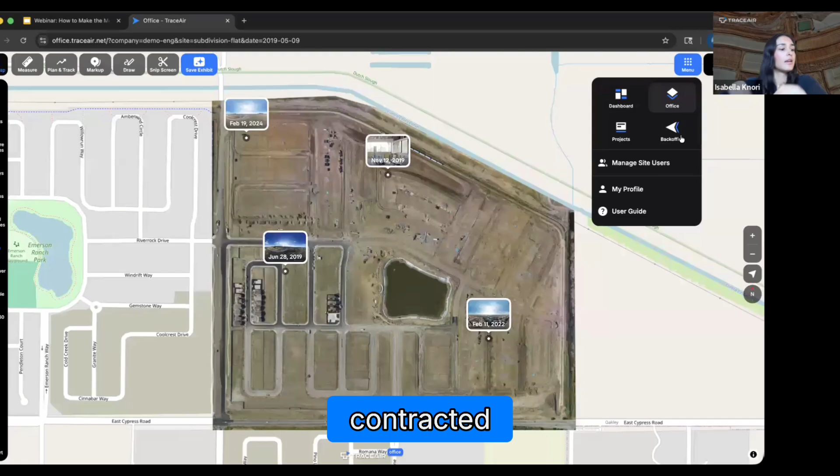The next thing that's really important that week one is setting up your Pano 360. So every time we fly the site, you get an updated panorama shot. Usually by default, we're taking this at the center of the site, but we can take this shot anywhere. And this is one of our most popular tools, even though it's just a quick visualization. So making sure that we're capturing this over an important area of work, whether it's the active grading area, maybe an important amenity that's going to be installed, or a tricky offsite area that you want to keep tabs on, getting that set up week one will also really help set the project up for success so you can monitor what's really important to you on the project. And on your larger sites, we can add additional Pano 360s as well.

Now, the other item that's really crucial for week one is your overlays, your overlay uploads, and your overlay management.

So Ray's going to turn on the overlays tab over there on the left. Your overlays are all of the two-dimensional files that can be uploaded to the platform, really anything in CAD format. This is one of our most popular tools - you can catch so much just with your overlays, because you can see how the site is shaping up in real time compared to your plans.

For those larger projects where you're going to have dozens and dozens of files, creating a folder structure to keep them organized is super crucial. That's something I definitely recommend doing week one - setting up your folder structure, adding all of the relevant CAD, and keeping it organized so everybody can clearly understand where your files are and how that structure works. Super critical week one.

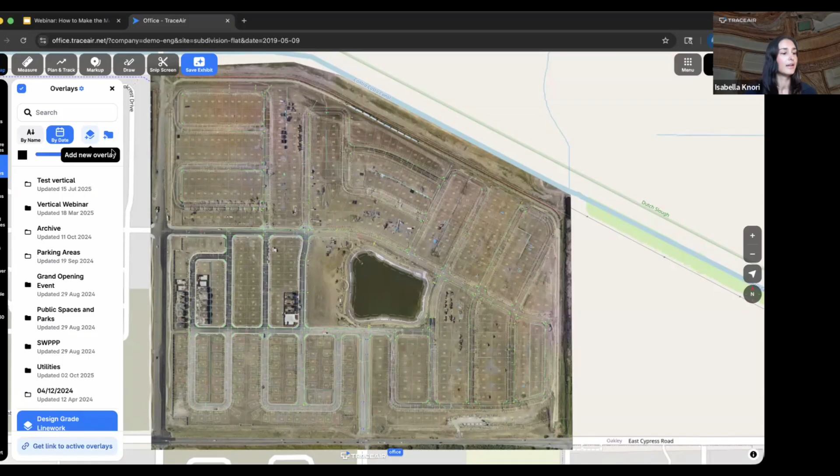This is something that Ray's team can really help you get set up and organized on that kickoff call as well. Next, week one is getting familiar with some of our more basic but powerful tools.

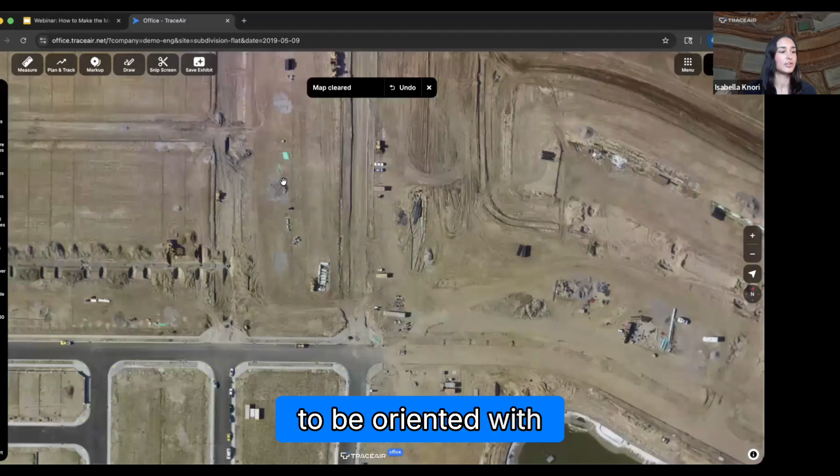So let's look at the measure tab. Week one, I would really want my clients to be oriented with stockpiles and the cross-section tool - again, super simple, but really powerful. So Ray's going to show these real quick for us.

Stockpiles - we are going to be able to measure any stockpile you have on site and get those quick calculations. Ray is just measuring a really small stockpile here, but you can do any size and quickly get those quantities. We're not comparing to any files, just raw dirt quantities. You don't have to wait for the surveyor - super quick information about your site and the dirt that you have.

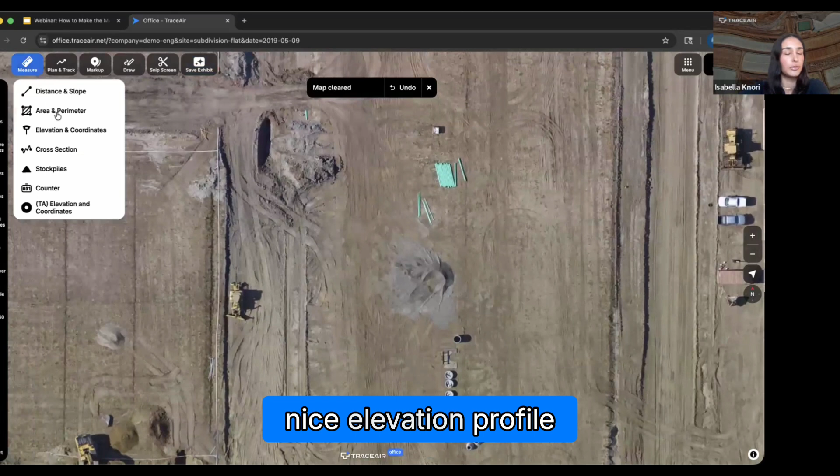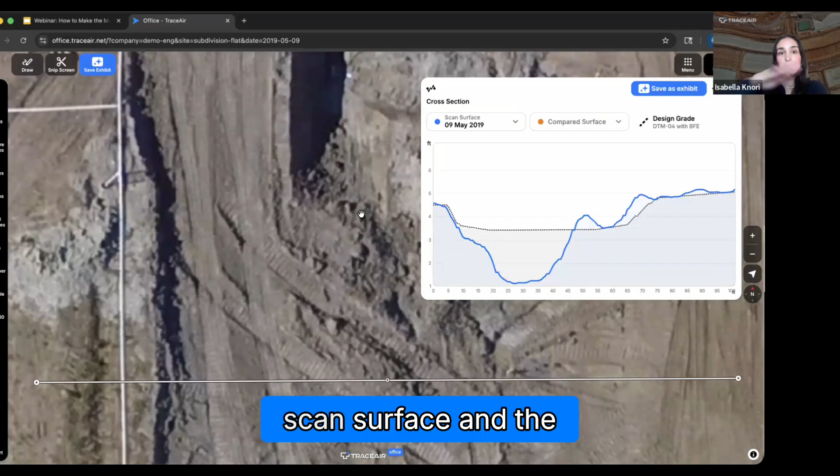And then the other one is cross section. Cross section is going to give you a really nice elevation profile. Ray's just going to draw a nice linear feature here over this road. When he makes his selection, you can see the blue line is the scan surface and the dotted line is the design grade. So you can easily see how close to grade you are from a really nice cross-section elevation profile view. Super powerful.

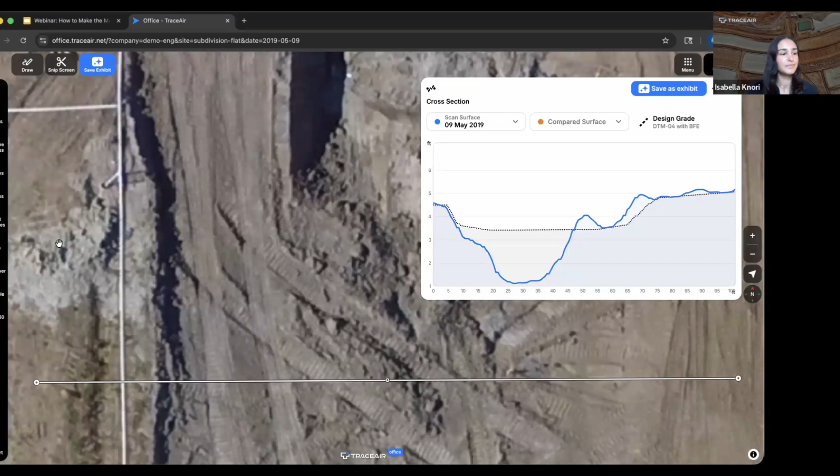And this works really well with your overlays, right? Turn on your overlays and use those files as your guide to your measurements. So that would be week one.

Now let's jump into week two. Ray's going to show you a couple beneficial tools for that week two. Maybe you have your second scan week two, right, for weekly flights. Let's see what Ray's going to show us for week two.

The first tab I want to draw your attention to here is the Compare Surfaces tab, because this is going to be the foundation of the next two tools we'll be looking at. If you click on Compare Surfaces, the first item you'll see is Design Grade. If you activate this, it's comparing the current surface of May 17th to your design grade, showing what work needs to be done to get to your design grade.

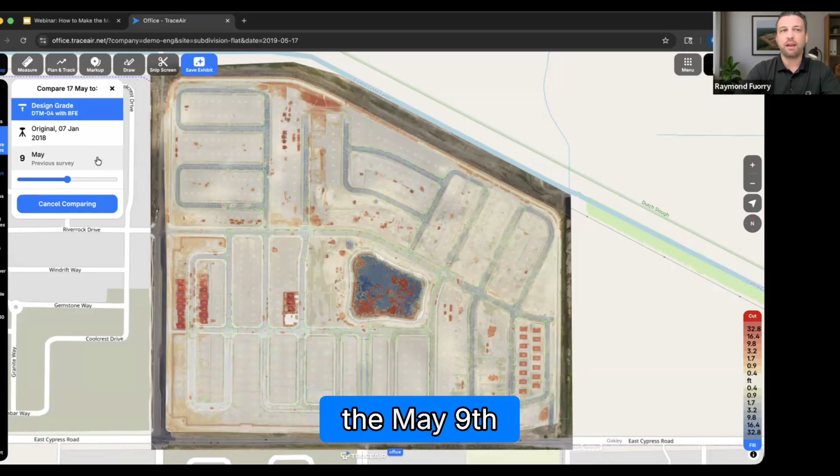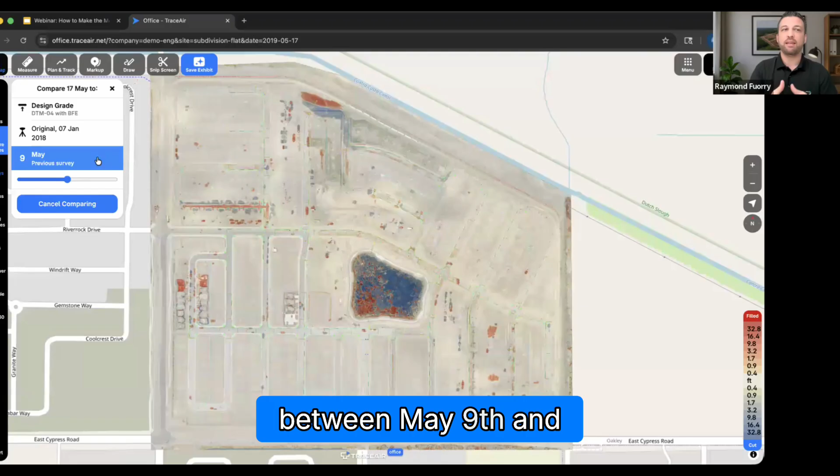The next one you can see here is if you have an original topo, we can absolutely upload that. If you had done a LiDAR scan with us, we can upload that too. And then the item below that is the May 9th scan, so this is comparing the May 17th flight to the May 9th flight, highlighting the work that has been done between May 9th and May 17th.

With that set up, with that knowledge in your hand, let's go and look at the plan and track and cut fill balance tool. What we like to do when we're first getting started on the kickoff call is just create a full whole site balance of your site. This is a one-time set it and forget it type deal, where as you encapsulate the whole site, you'll get the overall balance of the current status of the site.

And what we're going to do for best practice is to save this, and we will name it whole site. Then at any point in the future, when you have new scans, these calculations are going to automatically update - that's what I said, set it and forget it. You only have to do it once, and the calculations will be done for you.

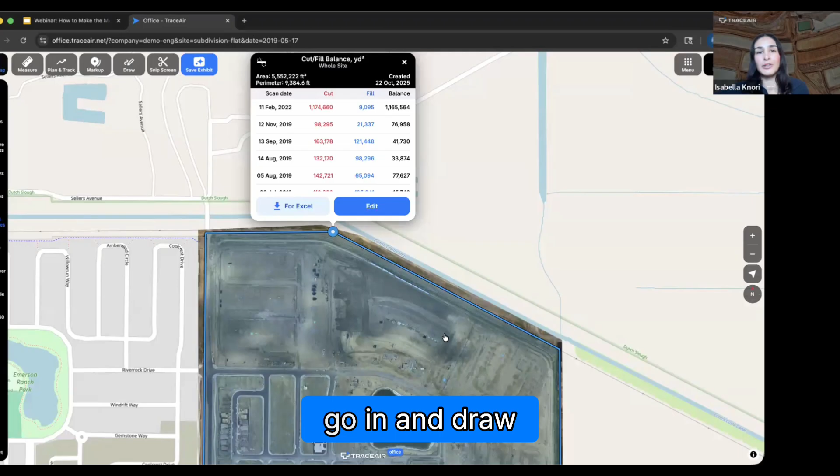Especially helpful in the bigger sites or the more complex grading areas - you don't have to go in and draw it every single time you get a new scan. Just go in once, capture everything you're interested in, and then, like Ray said, set it and forget about it. Just turn it on with each new scan.

Absolutely, and every site is different. So you can do a whole site, you could do phase one, phase two. You know, as granular as you want to get, you can get there. So I'm going to go to save quantities and turn this layer off.

The next tool I'm going to show you is the plan and track quantities tool. As we discussed before with the compare surfaces, we're now comparing to the May 9th survey. This is going to show you and calculate the exact measurements of what has been done since the last scan. We'll encapsulate this specific area, this stockpile, and it will show the total cut and total fill complete between these two dates.

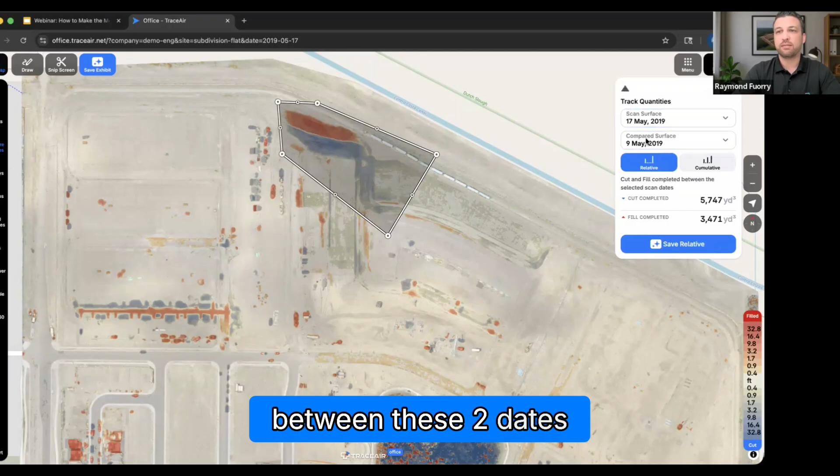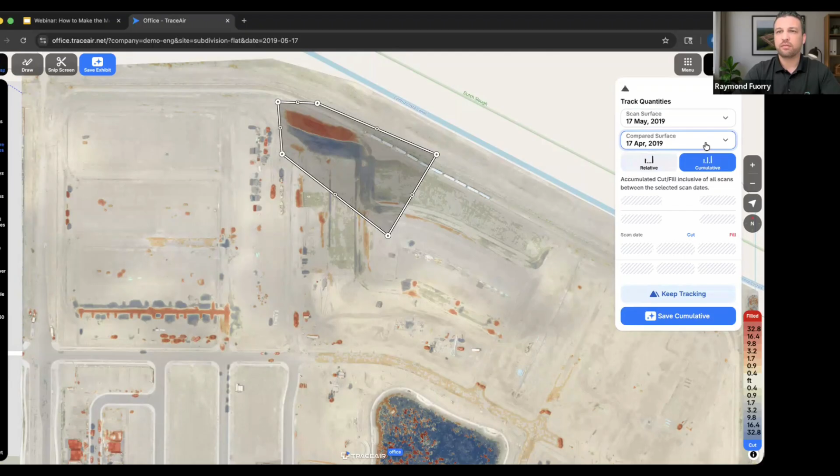Now, as you get more scans in your system, you can click on this cumulative tab, and we can go back a little bit further, and it's going to automatically calculate for every scan in the future. You can compare it to anything, so you can really verify the dirt that is being moved on site.

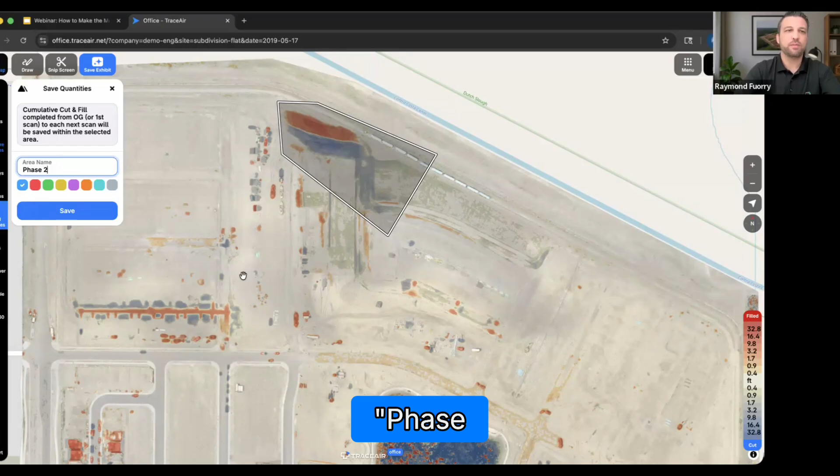And again, I'm going to keep tracking. I'm going to say phase 2. And because I've done this and saved it, I can always just come back to it in my Save Quantities tab and activate or deactivate it. But as you'll see here, it's calculating everything automatically.

Perfect, and that's definitely what we would want to see after a couple weeks, right? Familiarizing yourself with those more powerful dirt calculation tools and creating those saved quantities.

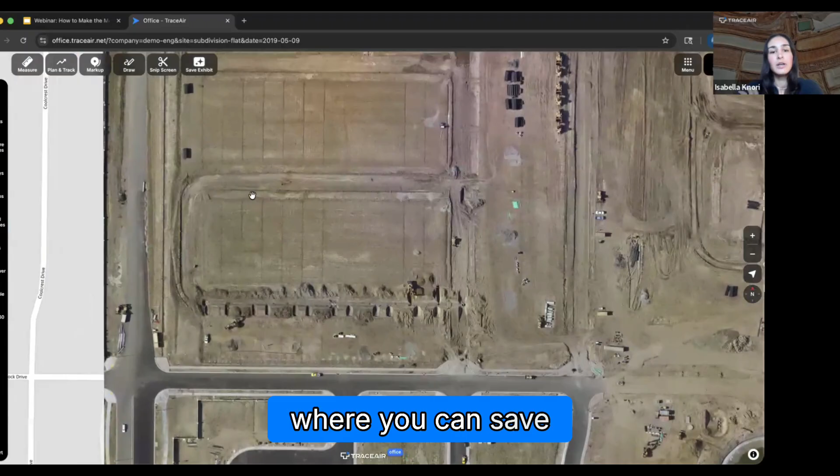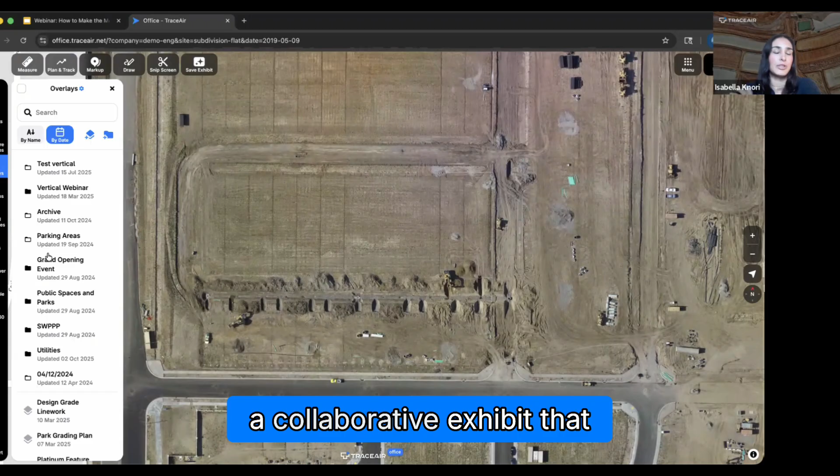Now, as we move into week 3, we've got more scan data to work with. This is where I'd really want to see folks starting to create exhibits and getting more collaborative. We have this great tool called Exhibits, where you can save pretty much all of your measurements. Any of the tools we just showed can be saved as an exhibit, but I really like to show it with the utilities tool, creating a collaborative exhibit you can share with your team and contractors to get everybody on the same page.

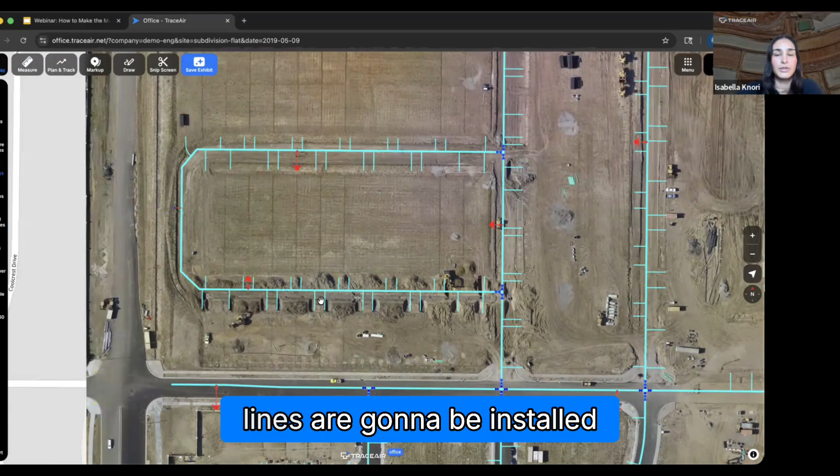So we're going to turn on this water supply overlay, showing where the water lines are going to be installed. Then I'll have Ray go to plan and track again, and we'll turn on the utilities tool. What we're going to do is create a nice visualization of the work that's been completed and the work that still remains.

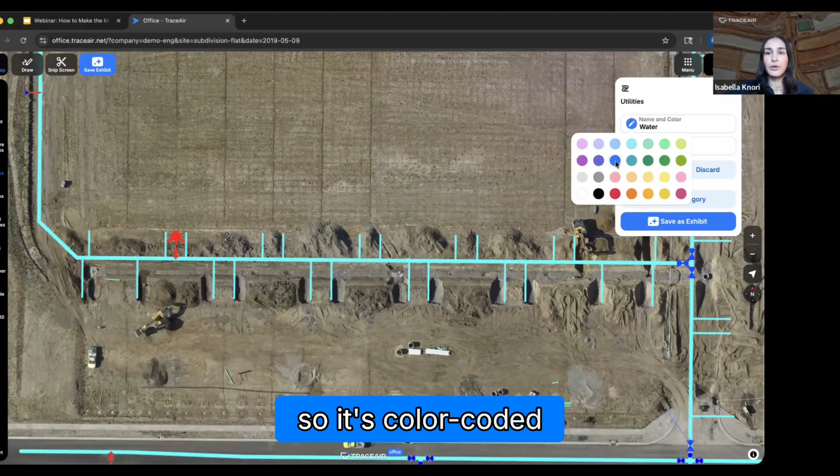So we'll just call this water, and we'll make it blue so it's color coded. Then you can put your total planned feet in, or leave it at 0, totally up to you. Now everywhere that you click and measure, Ray's going to show you right here — once you create the line you're happy with, it's going to measure each segment and give you a running total, so you can easily quantify and visualize what's been installed or what still needs to be.

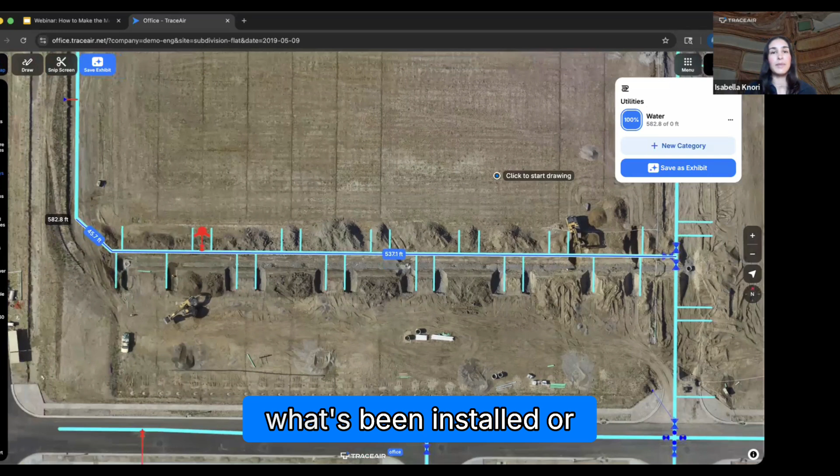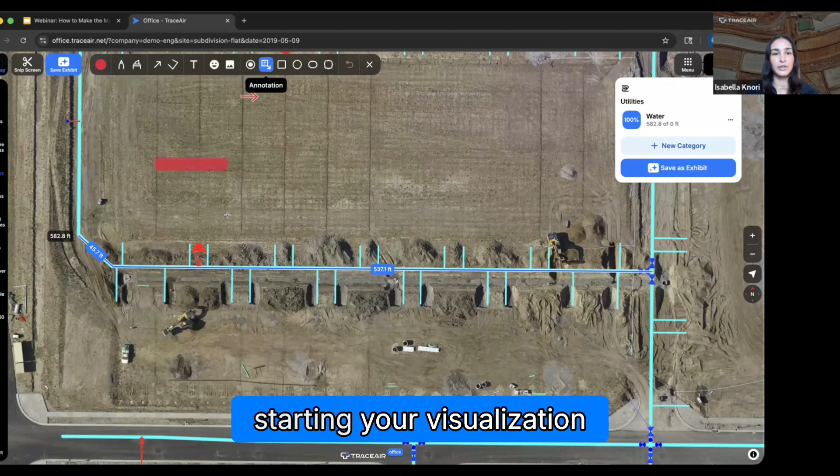So we can then add another category for sewer, or whatever it is you're interested in tracking. In this example, I'll have you label this one as line complete as of 10/22. Then we can add to this and keep it up to date. Once you're starting your visualization, you can also add text and arrows to make whatever you're trying to visualize crystal clear. So we'll say that this has been completed.

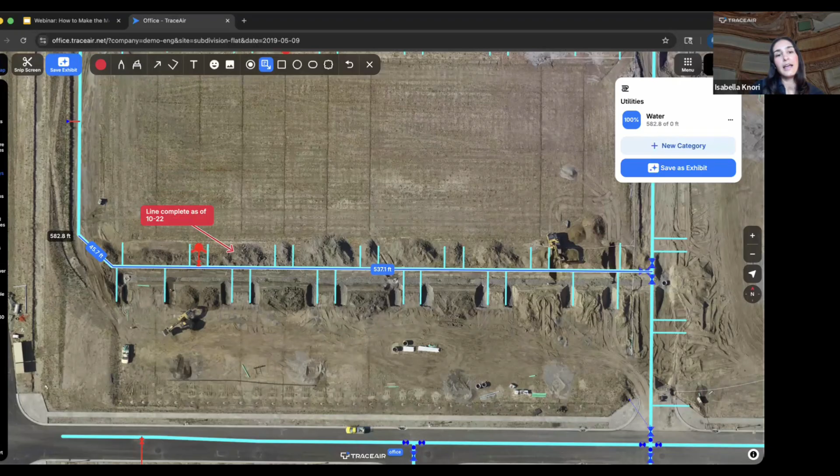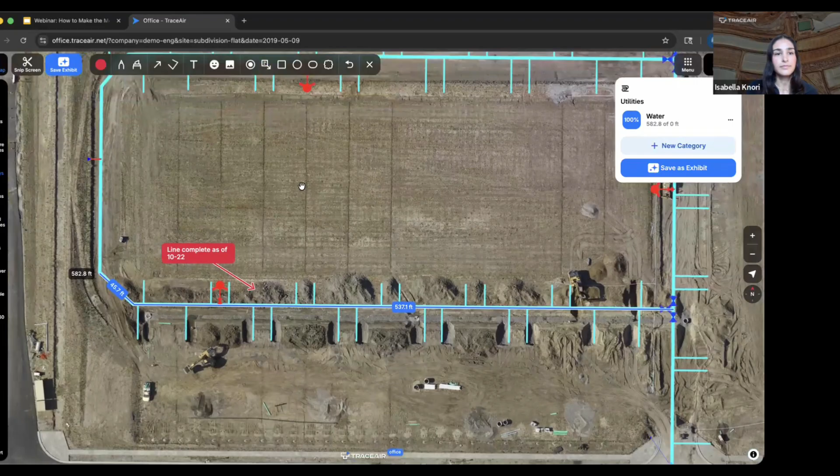Maybe we'll do another category for what still needs to be completed next week. Ray, when you're done with that, add one more category — we'll say water needs to be installed or completed, and we'll give it a different, lighter blue color. Click add. Now he can continue this nice visual to show what still needs to be completed, and we can quantify the linear feet that needs to be completed next week.

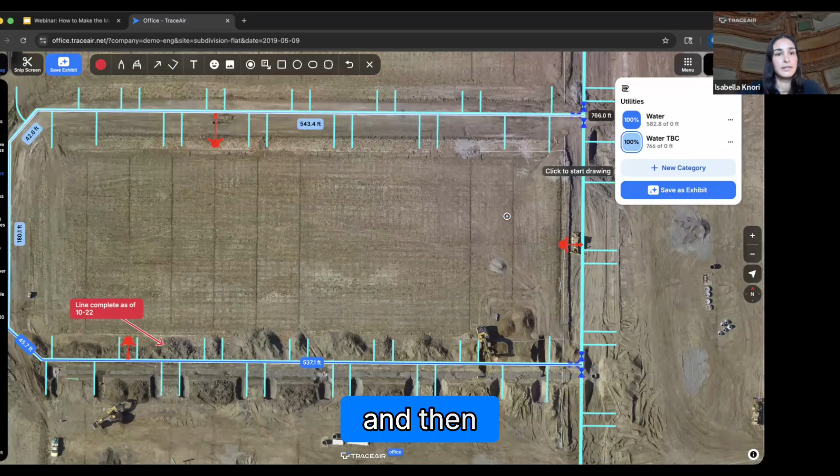Yeah, perfect, looks great. And when you're done making your first go at this, all you need to do when you're happy with it is click Save Exhibit in the top left.

Perfect. You'll give it a name. You can restrict the access, so you can either have the whole team see it or make this private. And when it is for the whole team, you can restrict the editing. So if you want it to be more collaborative, leave it as everyone can edit. If you've done a ton of work in here and don't want anyone to mess with it, you can do only view, which will restrict the editing and folks can only view that.

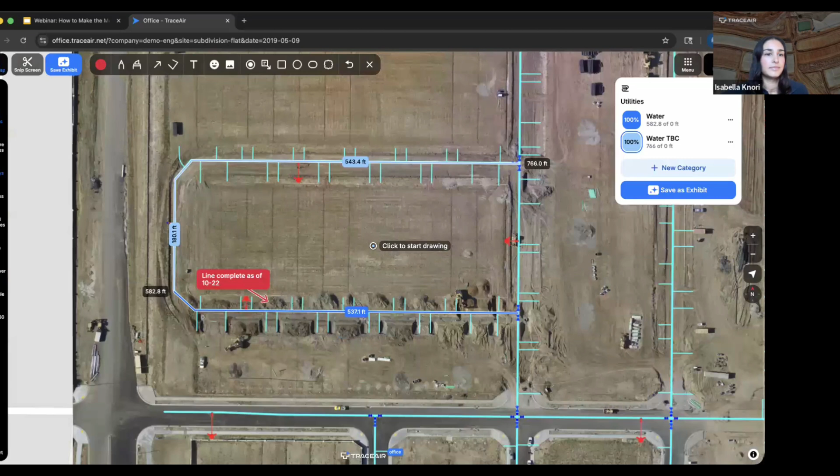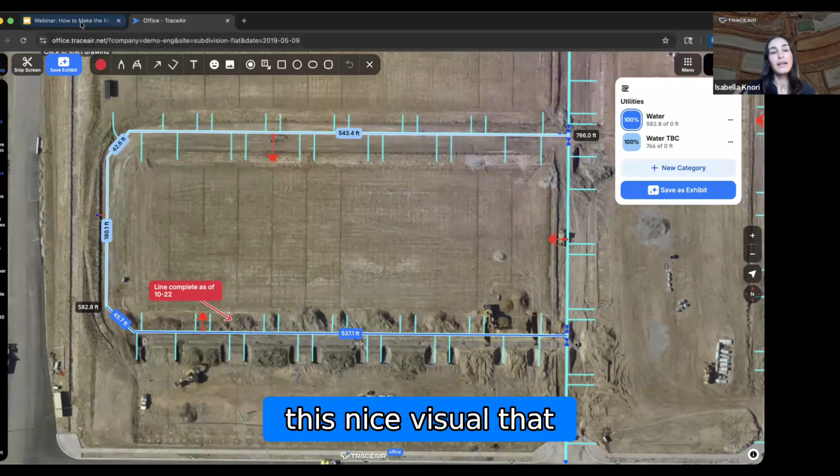Now you're going to click Create Public Exhibit. And when Ray X's out of this, when we clear the map, that is now saved under your exhibits tab over on the left-hand side. And everything that we just saved, if you turn that back on, pops back up. So it's a really nice bookmark for whatever you're working on, but then it creates this nice visual that now you can share at maybe your biweekly land meeting.

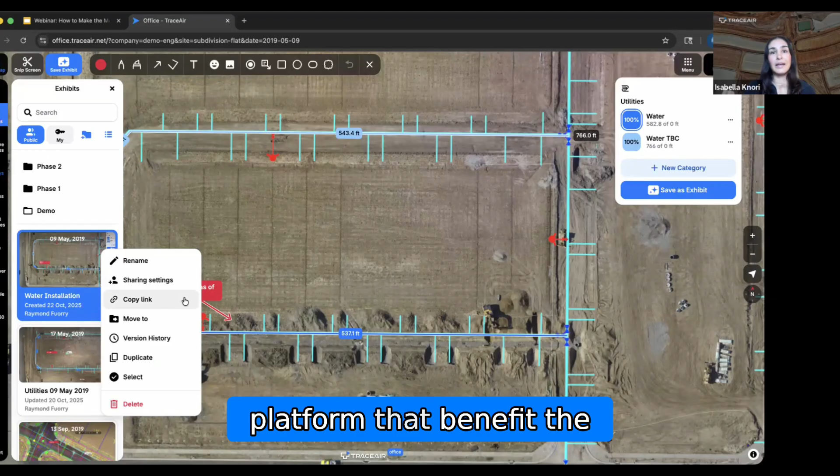You can take a screenshot of this and send it directly to the contractor and make it really crystal clear what your expectations are. It's a really great way to keep everybody on the same page and in the loop. And that's really what we want to see kind of that week 3, right? You're starting to share the data and create meaningful updates within the platform that benefit the whole team and keep everybody on the same page.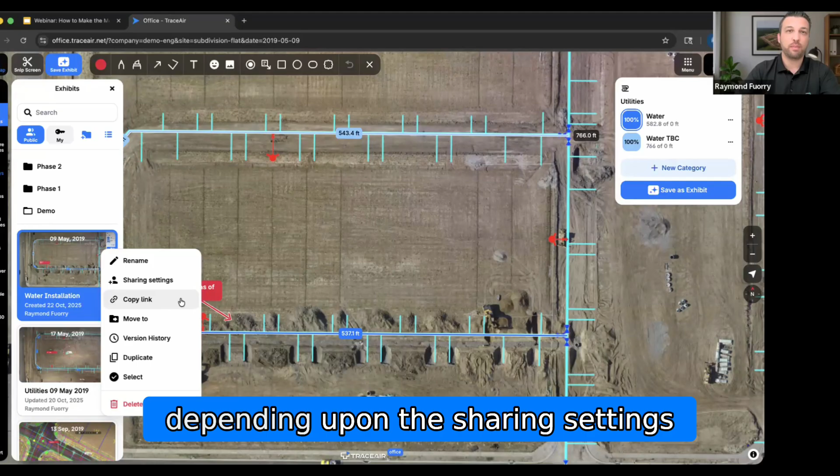Yeah, absolutely. You can copy the link so anyone who has access, because you have unlimited users, they can come in and depending upon the sharing settings, they can come in, make edits, view from their office. It's really a very valuable tool to capture the specific progress that is happening on site.

Yep. And you can keep these totally updated as you get new scans, or you can create new exhibits to track the progress. It's totally up to you.

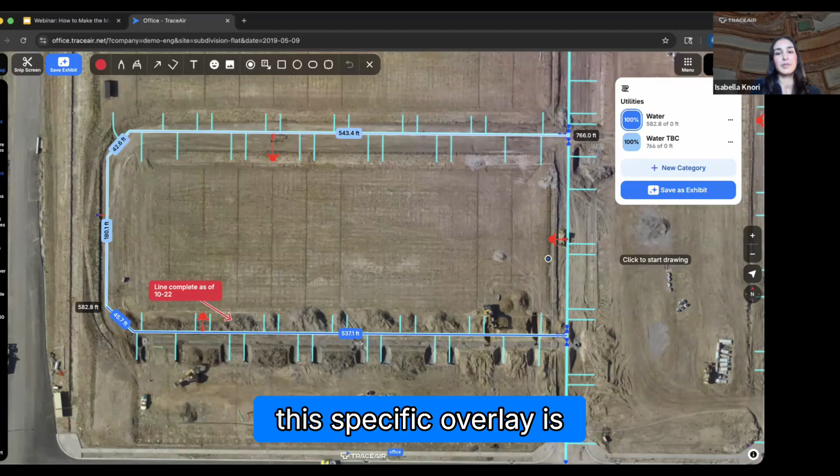I also think this specific overlay is a great example too of some of the items that you can catch with your overlays. Because you'll kind of notice here with this overlay, you can see that the trenching is actually a little bit south of where it's noted on the plans.

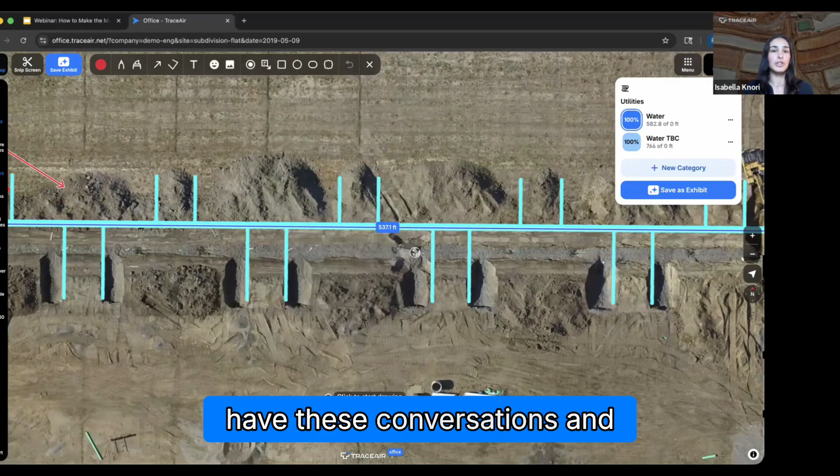So right here, this is where you can start to catch things, grab those screenshots and say, hey, why are you trenching 10 feet south of the plans? Are you wrong? Are the plans wrong? You can start to have these conversations and get ahead of costly mistakes and save a lot of time.

We all know in construction, your time is just as valuable, right? So anything you can do to save time is really going to benefit everybody in the long run.

Absolutely. And so you can share that exhibit, or for a quick share, you can use the snip screen tool here. It'll take an image of exactly what you're looking at. You can send that off via text, via email, whatever you need.

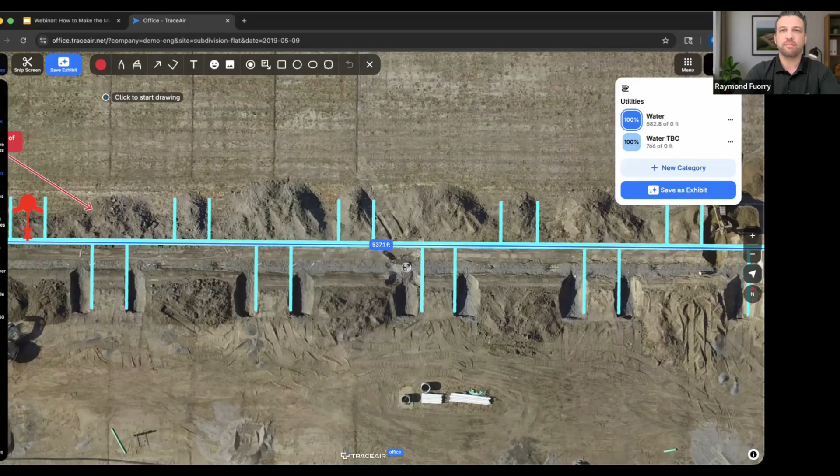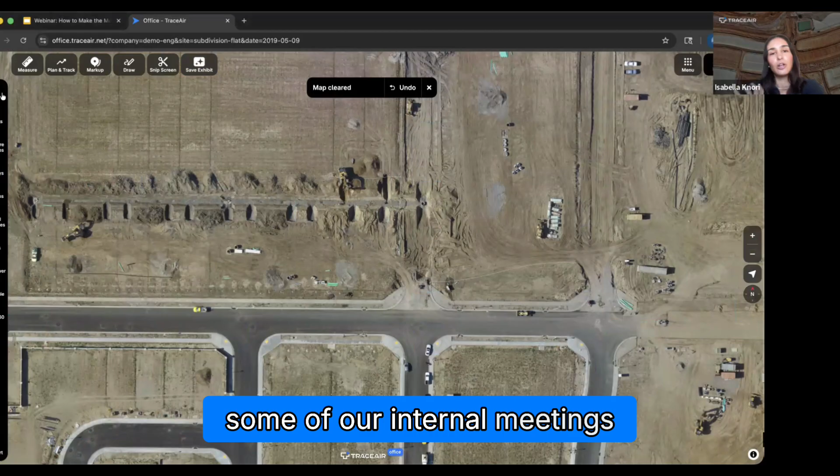Yep, absolutely. So now we're wrapping up week 3. We've created some exhibits. We've shared with our contractors and maybe at some of our internal meetings, all of our users are set up. Now we'll kind of jump into week 4 and 5 as we kind of wrap up our 30 days.

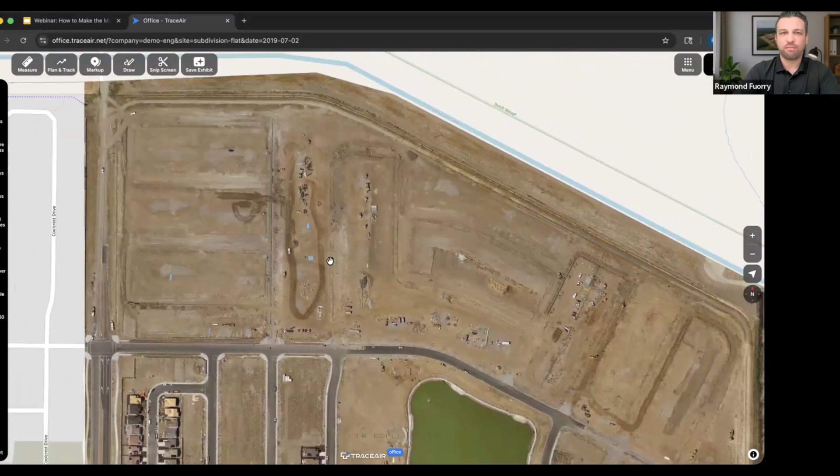Yeah. No, absolutely. As scans progress, you know, as we were just speaking about, you'll be able to catch some things that are happening incorrectly on the site, and really avoid a lot of rework.

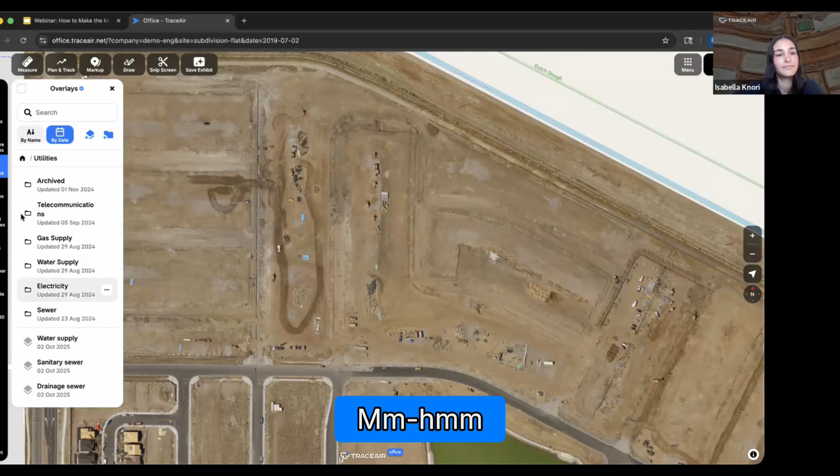I'm just going to go and pull up our design grade line work. And if I zoom in here, I'll be able to catch a potential mismatch of what happened in the field versus what my plans were. And one thing we can do here is, the line work is a little thick, a little bright. We can move the opacity here so you can really mix the visuals between the line work and the site.

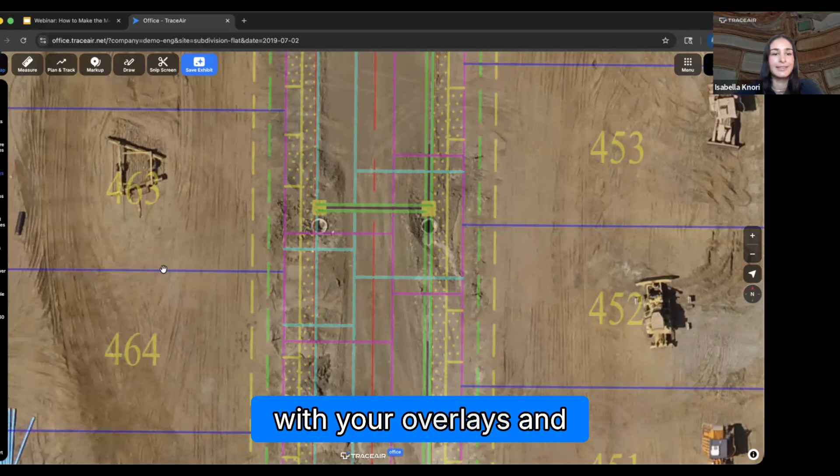Yep, another great example of just all the things that you can catch with your overlays and really see what's going on the site compared to your plans. Awesome. Also, this week 4, right?

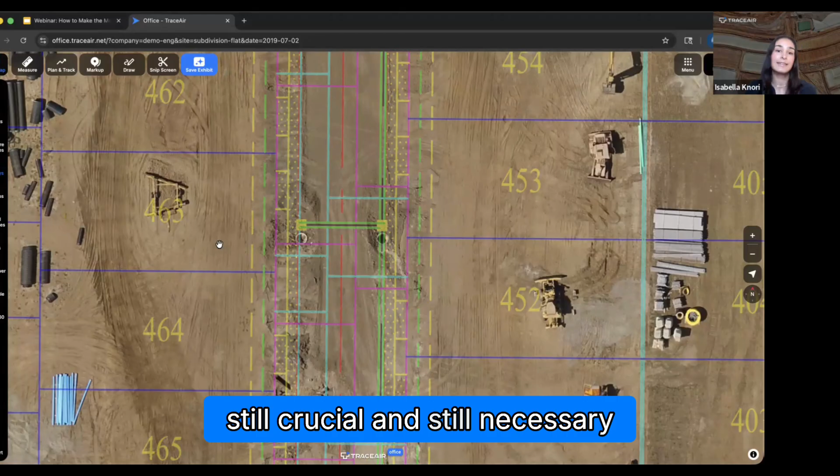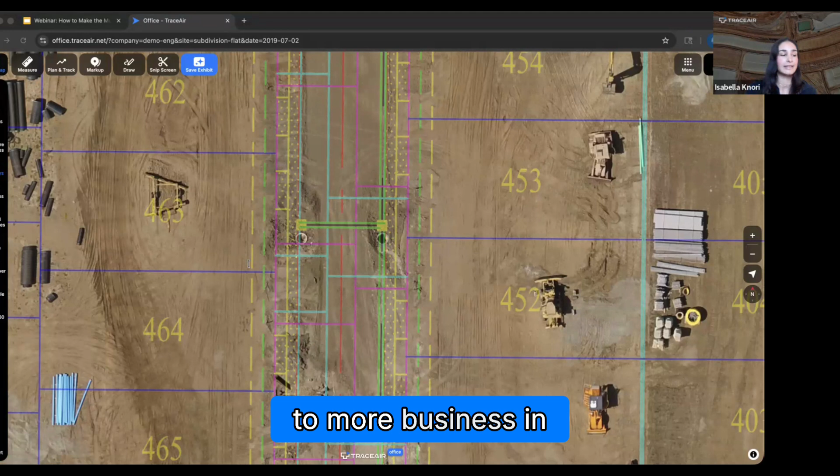You've been using the data in your office. This is also where we see folks saving a lot of time, maybe on some of their site visits, right? So if you have a site that's really far away from your office, of course, site visits are still important and still crucial and still necessary. But if you could save one visit out of your week because you have a recent scan that shows you exactly what you would need to check, that's a win, right? So we like to see at this point in time too, maybe saving a little bit of windshield time. You can go to sites that are maybe more critical or attend to more business in the office, right? This is really where you'll see a lot of benefit, especially if you're getting the scans regularly.

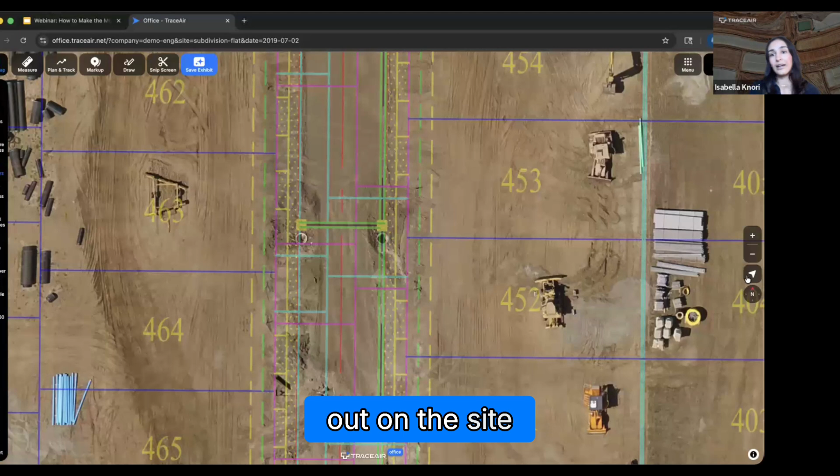And then when you actually are out on the site, right, doing those crucial site visits, this is where I love to see people starting to use TraceAir Mobile. So TraceAir Mobile works just as well on your phone or tablet as it does on your desktop or laptop. And it can be really beneficial when you're out on site. So that's why I also always recommend folks, give it to the folks that are actually out on the site every day, because they can pull up the plans and take measurements while they're out there on the fly. Super, super beneficial. And there's just so many use cases, right, when you're actually out on the site.

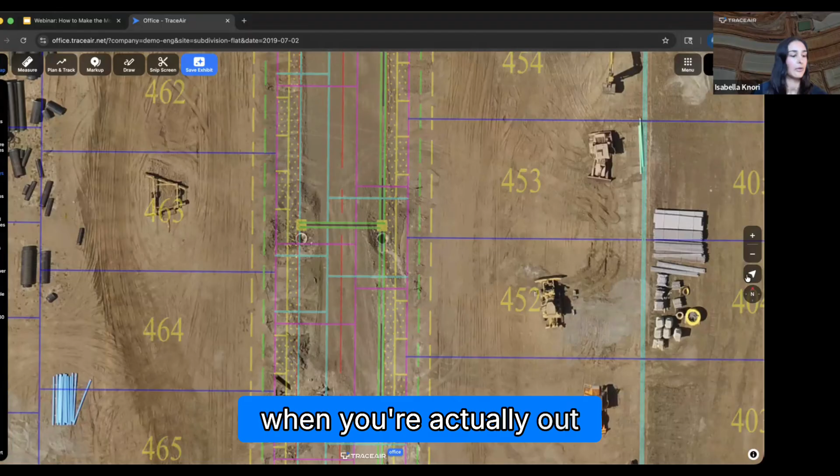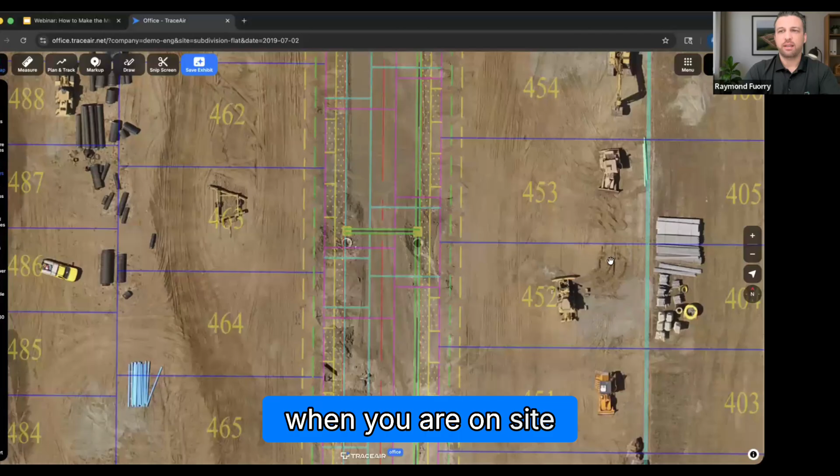And I think Ray's going to show us really quick how to maybe do some markups and add some photos when you're actually out on the site. Yeah, and when you are on site, if you hit this triangle button over here on the right, you'll see it on your phone or your tablet. What this does is this geolocates you on your site, and you'll see a blue dot where your location is. So people really like this to see the plans from above and actually seeing it live in person.

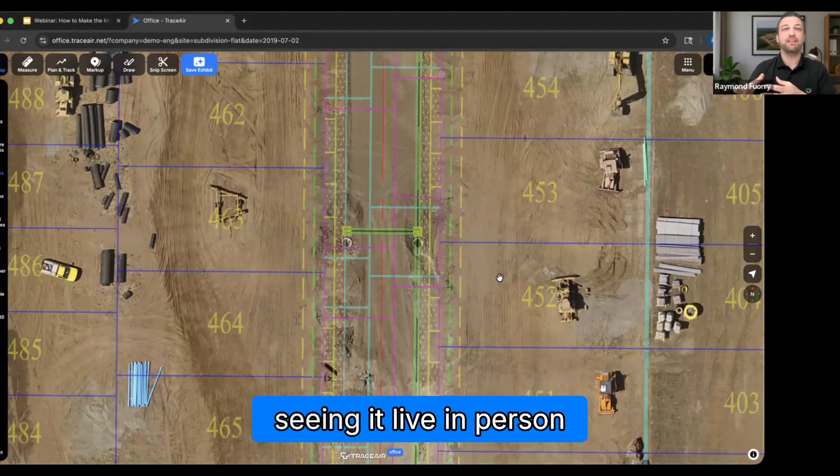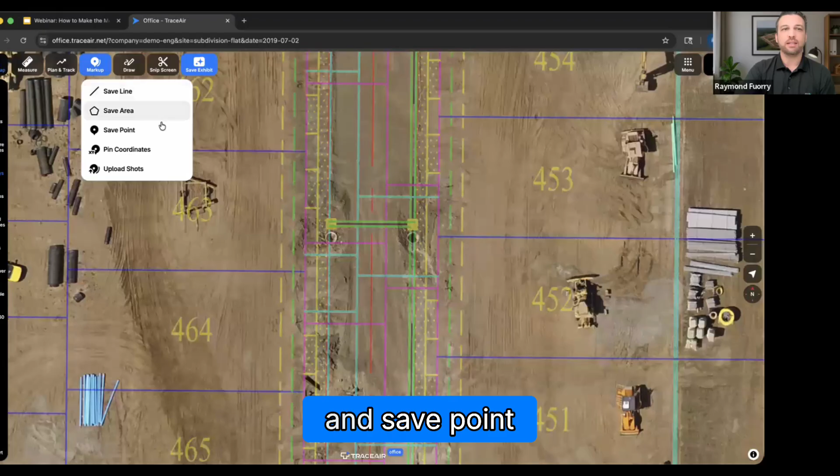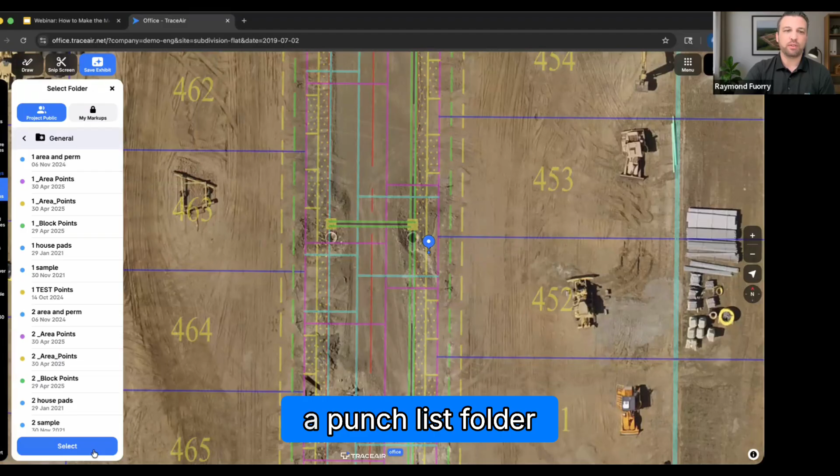And so when you are going around site, you're making punch lists or anything like that, a really valuable tool here is under markup and save point. So let's say that you were next to this error that you caught on site. You can place a point there. You can select a folder. Maybe you have a punch list folder or an error folder. You give it a name. But the key thing here is where you click upload photo, you can take a picture of this error.

Or whatever, right on site on your iPad, iPhone, whatever, upload it, and then you can come back to it at any point. You can make a comment that it was resolved, or we need to resolve this. And then the people in the office will be able to see this and make adjustments in real time. Yep.

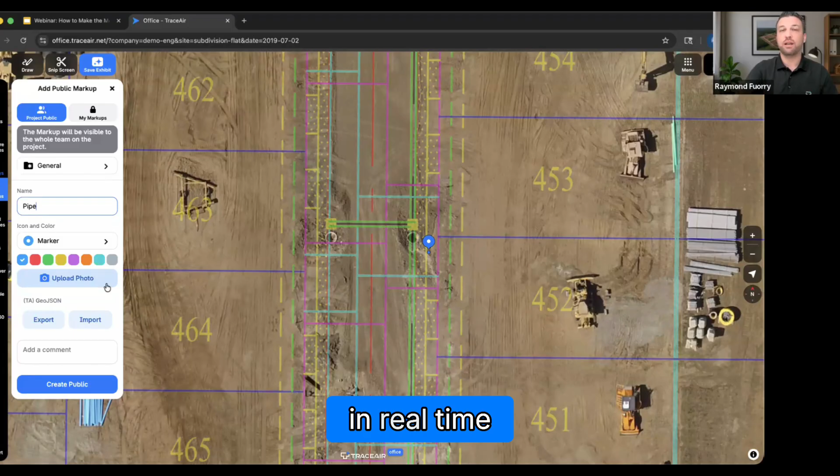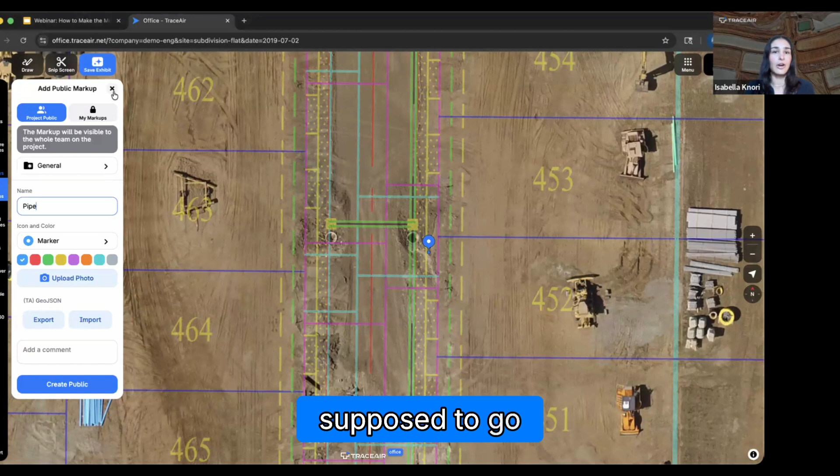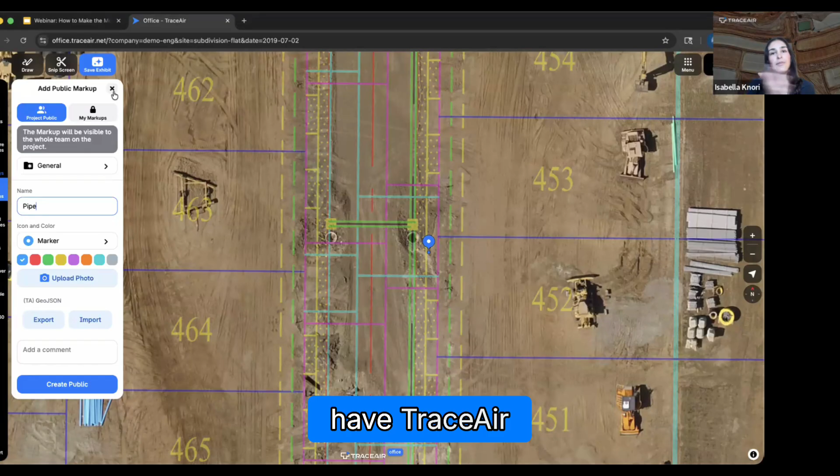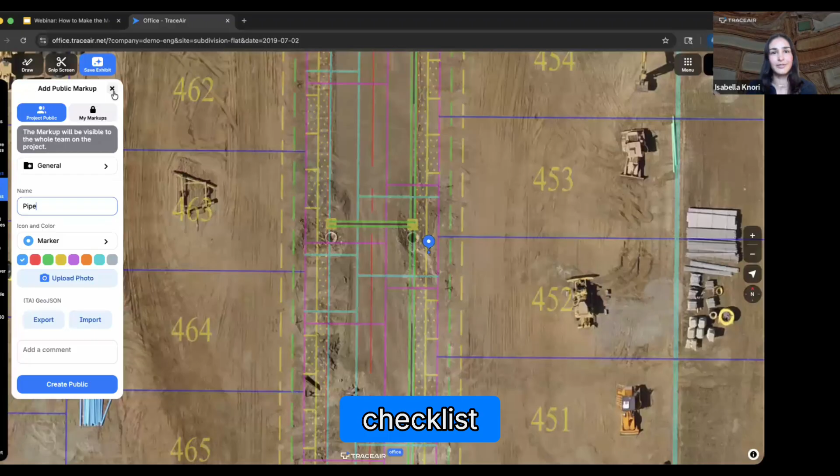Absolutely. And I had a really great story recently. I had a client that was out on the site and they were actually getting closer to wrapping up development. And they had the contractor come to install the entrance monument for the community. And they arrived before they had the surveyor stake out where it was supposed to go. And on the fly, he was able to pull up his plans on TraceAir Mobile, see exactly where the entrance monument was supposed to be, virtually stake it essentially, and they were able to complete the install that day. Whereas if he didn't have TraceAir, he would have had to send them away, reschedule them, get the surveyor, who knows how long it would have taken. He was able to solve that problem on the fly, save a bunch of time, and then that's one thing off of his checklist for the week. So I thought that was a really great one to share.

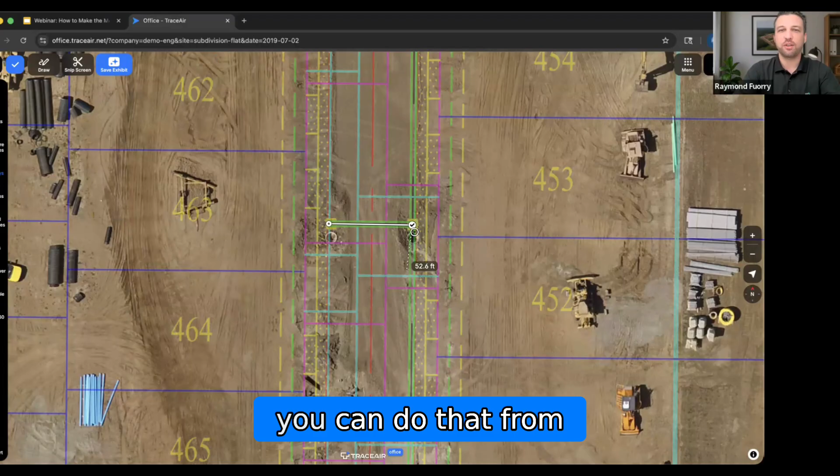Yeah, and I'm sure he used some simple tools like distance and slope, being able to measure something while you're on site looking at the overlays. If you don't have the tools on site to do that, you can do that from the platform. Yeah, absolutely.

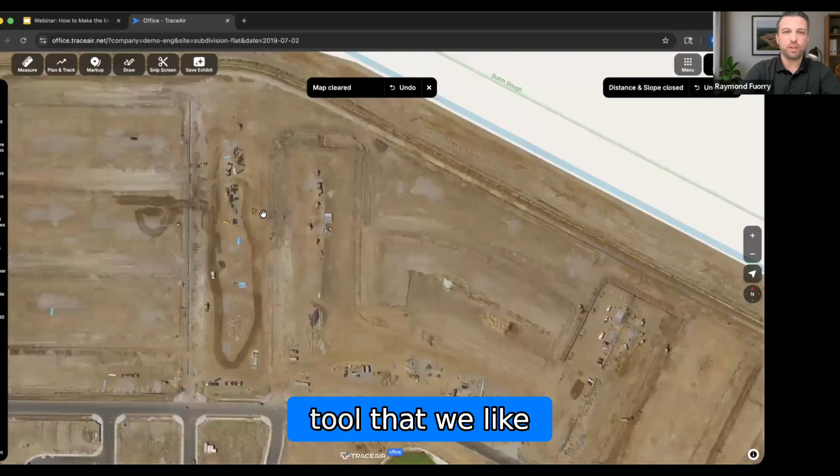Okay, and one thing I also wanted to highlight is this tool that we like to call the time machine. And how we sort of activate this is we go to our scans tab where we see here July 2nd. And this is going to activate this blue rectangle, this time machine here. And as you see, the more scans that you get into the platform, you'll be able to take more advantage of this. So over time, we want to see when did the pond start to get filled in.

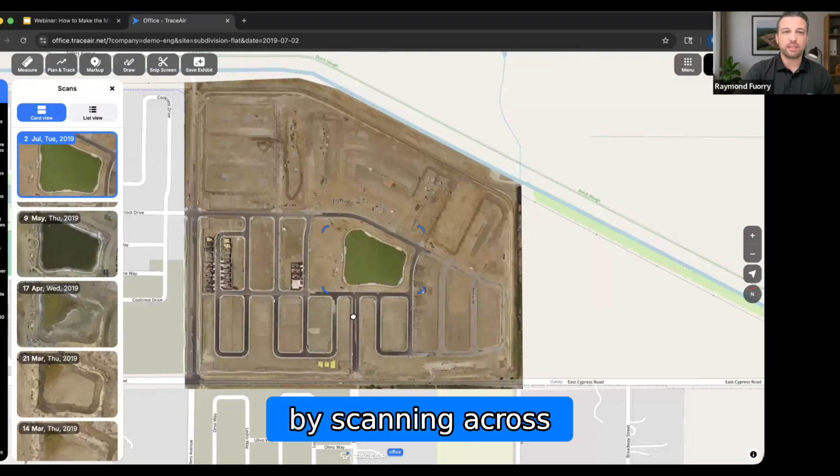We can just quickly zoom through this card view, and we can easily identify April 17th, March 21st—this is when we actually started to fill it in. So by scanning across, we can really see when progress is happening historically.

This definitely helps you navigate back to a specific milestone on the site, or if you're trying to pinpoint an issue. It's super helpful visually to navigate where you want to go, especially as the project progresses and you have lots of scans in your scans list.

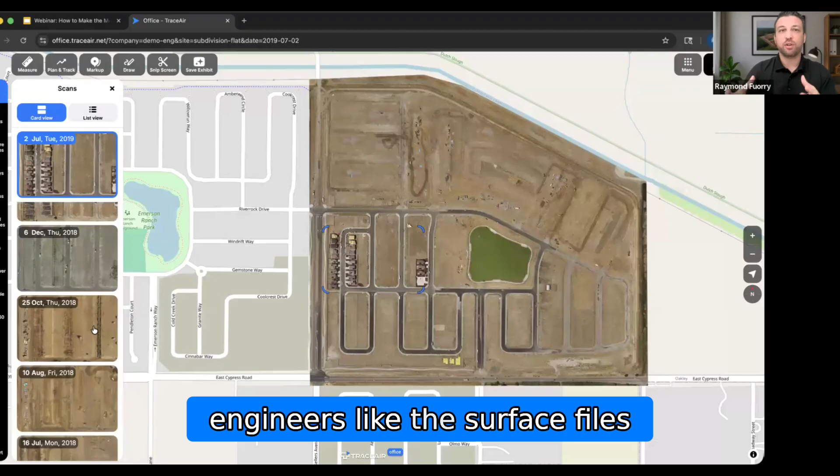Especially since a lot of engineers like surface files, like the TIN models, right? So you can go back to a specific date and easily export these files. You can ask your CSS or your program manager, and we'll get these files exported for you, and you'll be able to pop these into your software and make the adjustments.

Yep, absolutely. And I always go back to the unlimited users—you can also add your engineers directly to the platform to access the scans and files directly. I think at this point, as you're wrapping up those 30 days, adding some of those other collaborators and stakeholders in the project is a really great time to do that because there's a lot of benefit they can get out of it as well.

As we wrap up our first 30 days with all of these great tools we just showed you, I always want to emphasize that you do have a dedicated support team with Ray and the CSS team. That kickoff is not just a one-time training—we can do those as the site progresses, as you add new team members. We really want to be here to help make your project successful.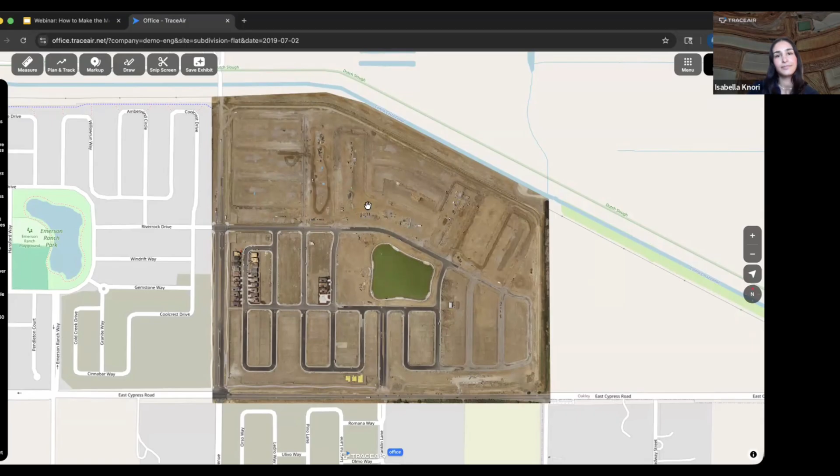So Ray, I'll let you talk a little more about some of the things your team can offer as far as training and continued learning, because we love to emphasize that. For sure. Exactly, the kickoff call is not a one-and-done thing. We are here to strategically advise you on your site, because every site is different, as we mentioned earlier.

But you're busy, and sometimes you want to analyze something and may not know the exact tool or workflow to get that done. You call us up, you email us, or use the support button to get in touch with us quickly, and we'll get back to you and make sure we use the right tool combinations to get the insights you need on a regular basis.

And it doesn't have to be just the land development team—we can easily have training sessions with your marketing and sales team, your executive team, your contractors. So it's really an endless support system that we're here to drive the most value for you and your team. Yep, absolutely, we want you to use it and we want to support you in using it to the best of the program's ability.

Awesome, so those are the main topics we wanted to cover for the first 30 days. I hope these workflows helped you and maybe gave you some inspiration of new tools to try.

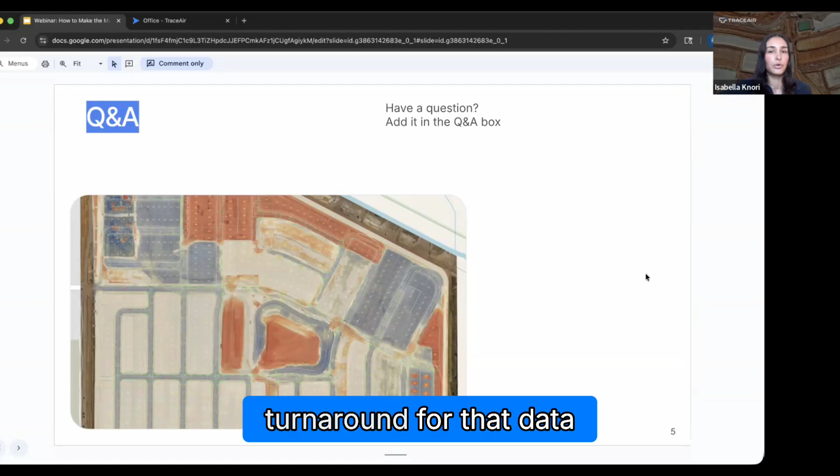One of the questions is: what is the right scan cadence for a project, and how soon after we capture will scans be ready? We typically recommend during active grading, when you're moving the most dirt, weekly or bi-weekly scans—that way you're getting regular updates and capturing all the changes. As you get closer to vertical, work slows down, maybe you're approaching winter, that's when we sometimes see folks switching to monthly. Every time we fly the site, it's usually a 1-day turnaround for that data to be ready in the platform.

And the next question we have is: which plan files should we upload first for grading utilities, and how do we manage revisions? That's a great question.

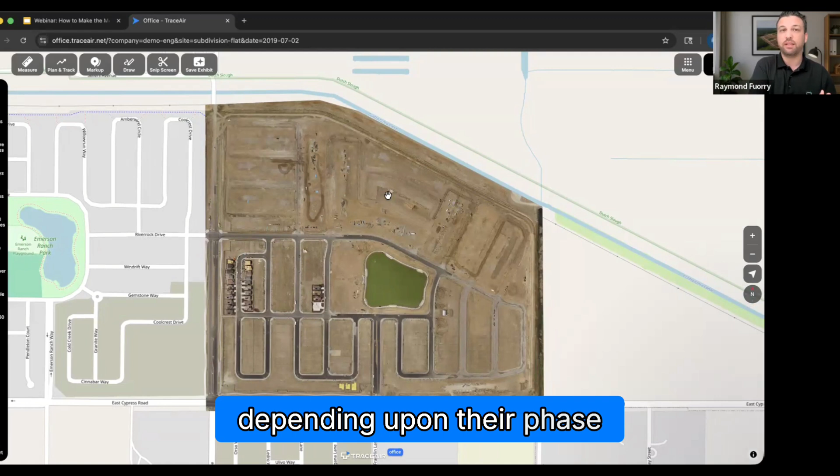For grading calculations and site plans, we really recommend uploading the latest and greatest, most up-to-date revision from your engineers, so you're looking at the most recent data. Some people start with a rough grade, then move to an intermediate, and then a final grade when they're getting close to turning the lot over to paving. At any point during your flight cadence, we can update the design grade as well as overlays.

When you want to upload a new overlay, you can come to the Overlays tab, click New Overlay, add in your CAD file, and we'll get that turned around in a business day, if not sooner.

I'll also add that an archive folder can be a really good folder to create. That way, when you add new plans, you can move outdated plans to the archive instead of fully deleting them, in case you ever need to reference them. But no one will be confused thinking those are the latest and greatest if they're in the archive folder.

We have another question from Deborah: how do I get the app for my phone? Amazing question. What's great about TraceAir is there is no app.

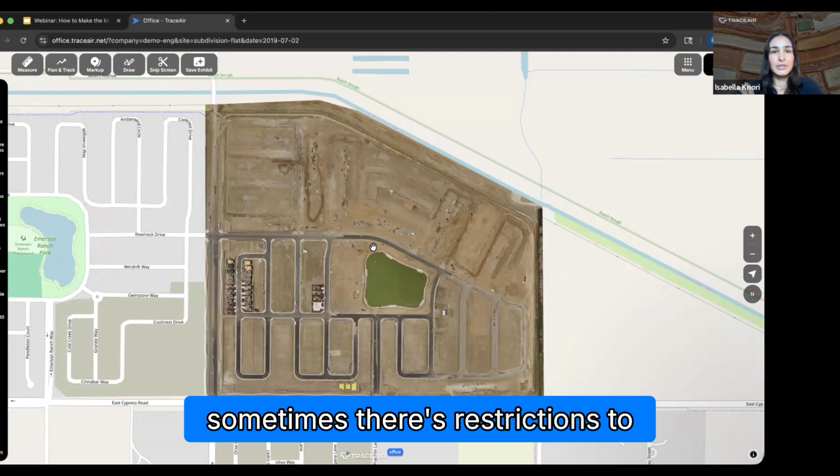It's all web-based, so whether you're on your phone or tablet, you just access it on your Chrome or Safari browser, whatever you use for internet access. You would log in to office.traceair.net just like on your desktop, and you'll have all the tools there. We do that because sometimes folks using company phones have restrictions on apps they can download, so we wanted to avoid that. It's all just web-based. Great question.

Let's see, we've got a couple more here. How do we share exhibits and pinned markups with contractors to drive decisions? So a couple options for sharing.

With exhibits, there is that copy link to share button. However, if you share that, they do have to have a TraceAir login. If you shared it with someone who doesn't have access to your project, they wouldn't be able to see it.

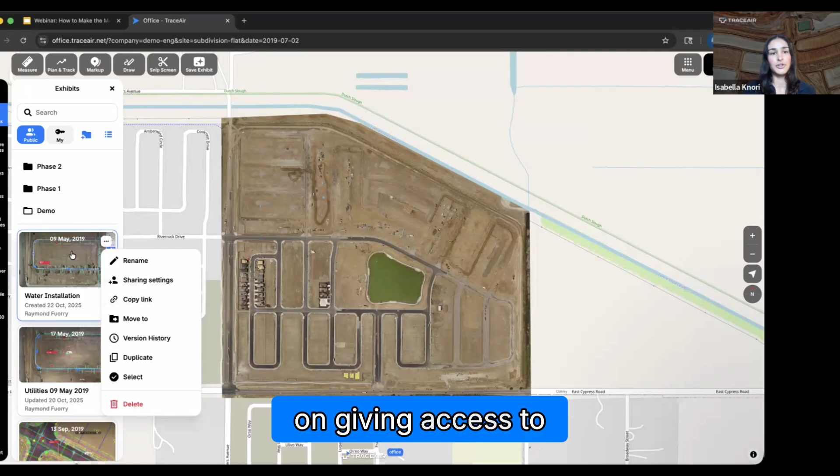But if they do have access, that's a very fast and easy way to share it, with that link. If you wanted to share it with someone you weren't planning on giving access to, the workaround is always going to be that snip screen button — it'll take a nice high quality PNG that you can attach to an email or send in a Teams message.

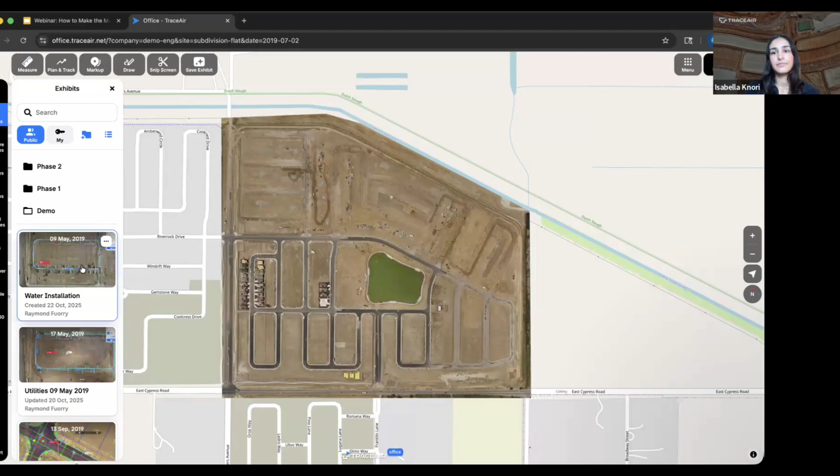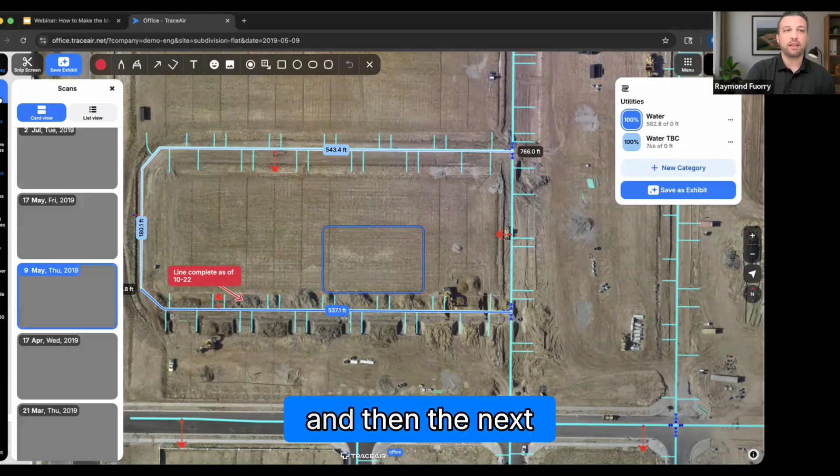That leads to another topic: exhibits aren't static, they evolve over time. For example, right now we're looking at the exhibit from May 9th, but then the next flight happened, and now we're looking at May 17th.

Before we had just put water to be completed, we can now adjust this and say that it has been completed. All we do here is say water has been completed, line complete, let's just say 10:30.

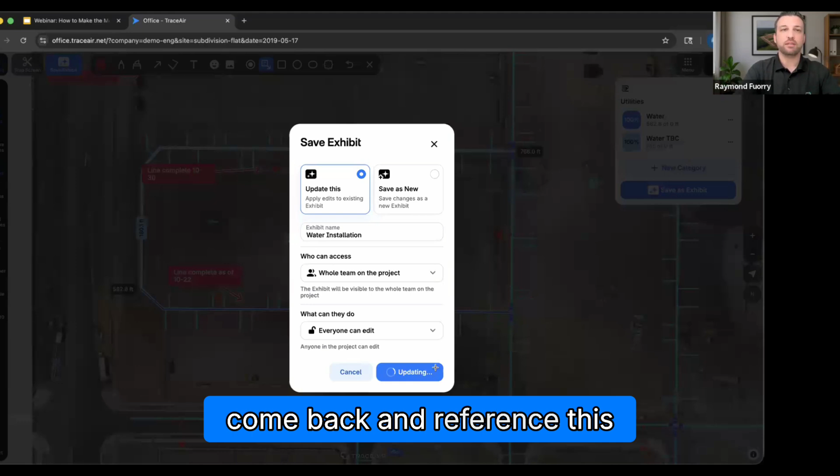Now we just save the exhibit, and we'll get the opportunity to update this current one or save as a new version. It depends on your workflow, but typically you can just update it and always come back and reference this. So based on the markups and notes you made, everything here is accurate.

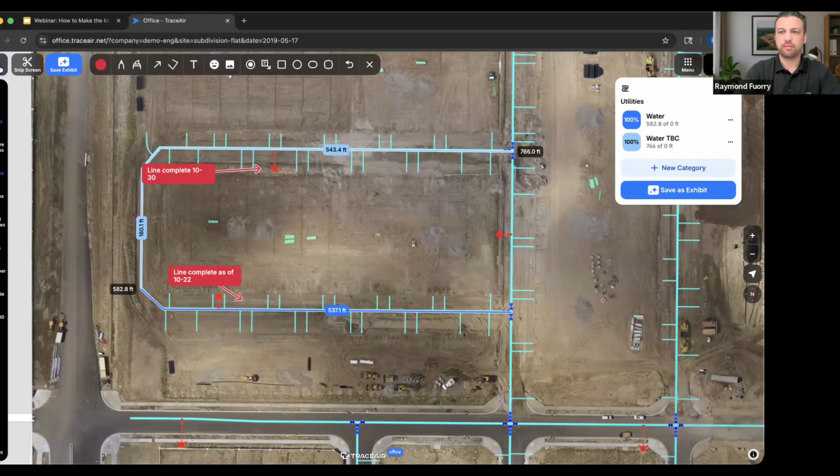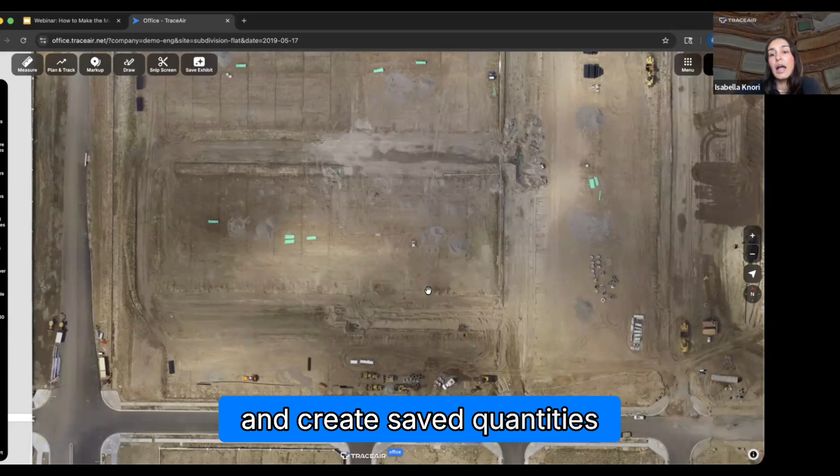We've got one more question in the chat: what's the fastest workflow to compare surfaces, review cut, fill, and create saved quantities? I definitely think the fastest workflow is to lean into the saved quantities, because once you create and save those, it's just 2 clicks to turn them on.

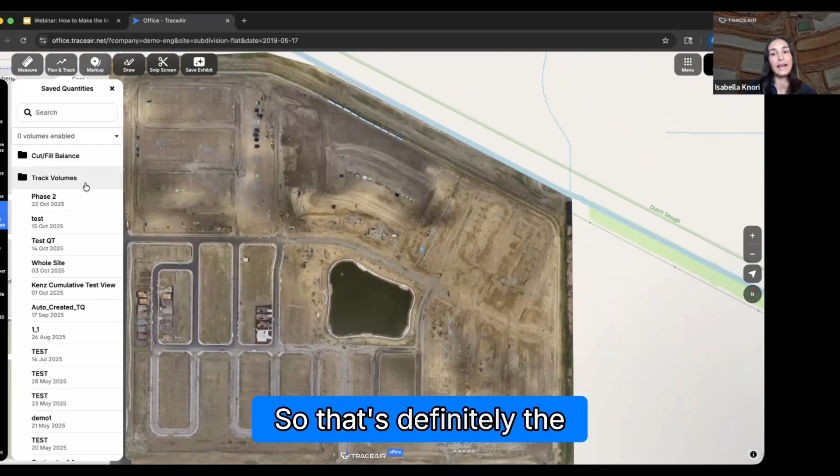That's definitely the fastest workflow. And that's why we emphasize this for week 2, because then it's set up at the beginning of your project, and everybody on the project can see these and turn them on easily as well.

Another really important thing to point out is anything in your overlays or saved quantities is public — anybody with access to the project can see them. So it can be a great way to quickly have everybody access the same thing, just with 2 clicks. Great question.

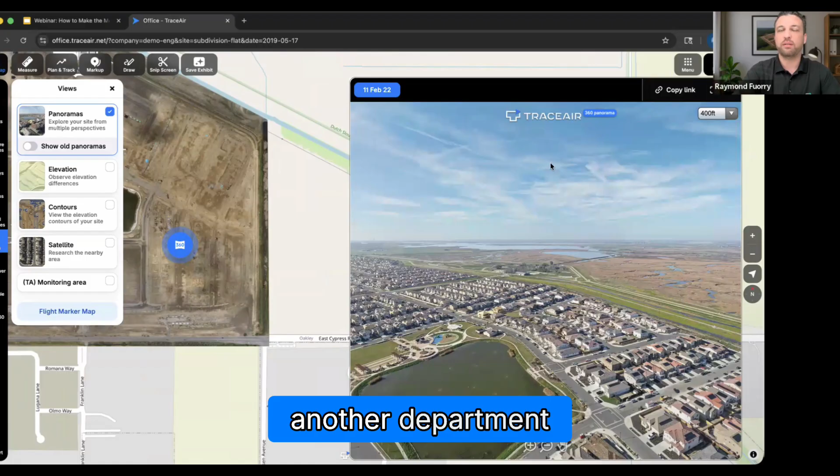How can I share a pano? That's a great question. What's really great about panoramas is that you can share them with anybody. They don't need to have TraceAir access, so you can share this with your marketing team, sales team, executive team, anybody. All you have to do is copy the link, and that will open up in a browser tab. Anyone can view it. This is a great way to communicate cross-collaboratively with another department. They can share this really quickly.